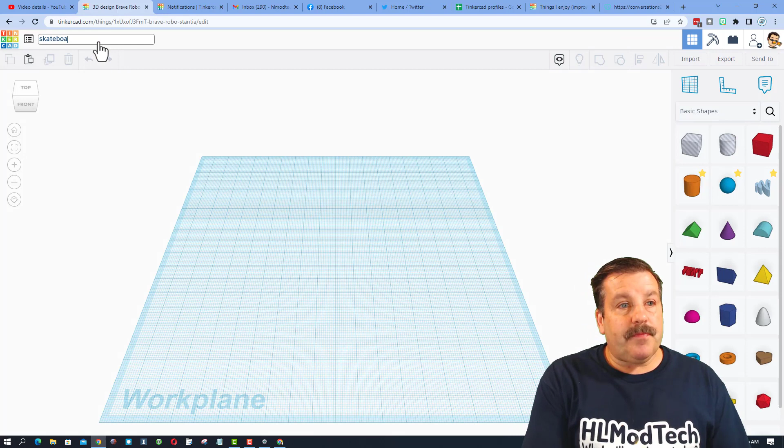So step one, friends, is to get to Tinkercad, hit that plus sign, and we're going to make a brand new 3D design. I'm going to name my design skateboard, and I always put my initials after it as well.

Friends, we are going to try and build reasonably accurate trucks. So what I did was I typed in skateboard trucks diagram. I've got a picture of it. You can see there's a base, there's a part that spins, there's a locking nut. This is the swivel that allows the trucks to work. We need a post and then the place where they screw on, and then we also lock it up top.

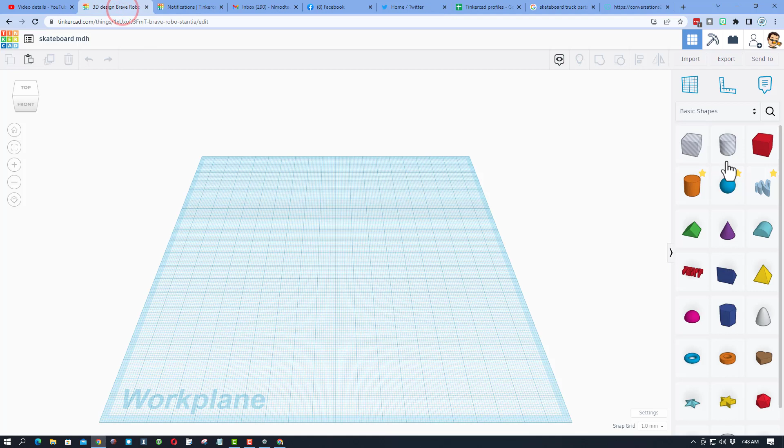Let's take this thought and go back to Tinkercad. The first thing we're going to add is a plate. When you bring this out, friends, I'm going to recommend doing shift stretch. I want to type the number 30 down here so it's 30 in every direction. But then I'm going to tell you that a good size for this is 2.

If we bounce back to our next design, maybe you can spot that this is a trapezoid that's got a chunk cut out of it. So watch this. Back to our project.

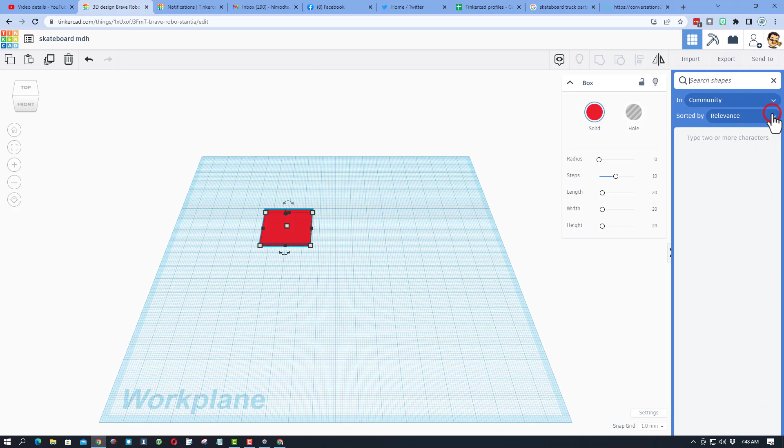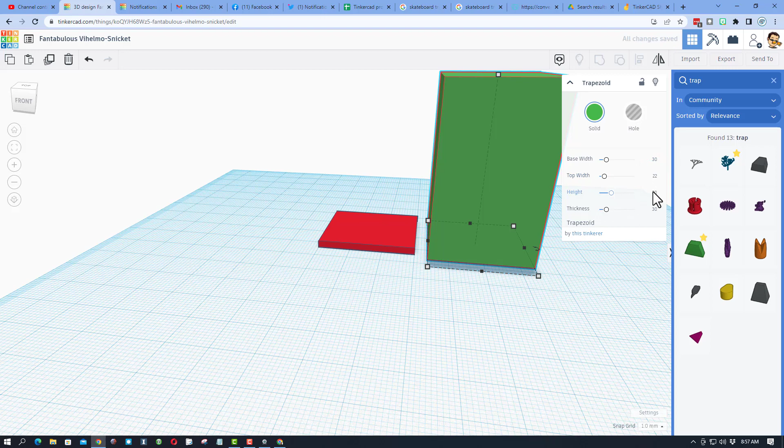Let's search for trapezoid. When you type trap, they will all pop up, and we want this one right here. When you bring it out, we need to rotate it 90 degrees. Notice if you stay inside the circle, it goes to those presets. If you go outside with your mouse, then it goes 1 degree at a time. So we want to snap to negative 90. And real quickly, I need you to type 30, 22, 12, and 10. And then wait for it to render.

And then, of course, select the 2 of them, choose align, make the red one the boss, and do center, center, just like that.

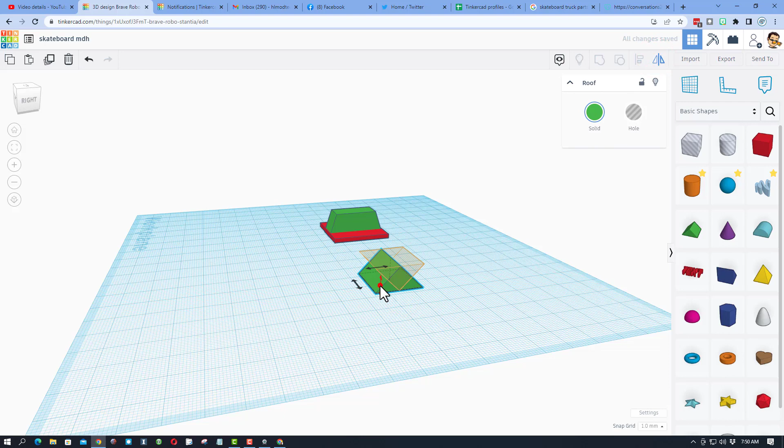Now the next part was to cut a wedge into this. Well, friends, that's super simple. We'll come back out here to the roof, spin it 90 degrees. Notice I'm staying inside the shape, and then let's flip it so it's the other direction. Let's make it a hole, and then pick how you're going to cut. So if I bring this over and I lift it up, remember you can also do control up and down.

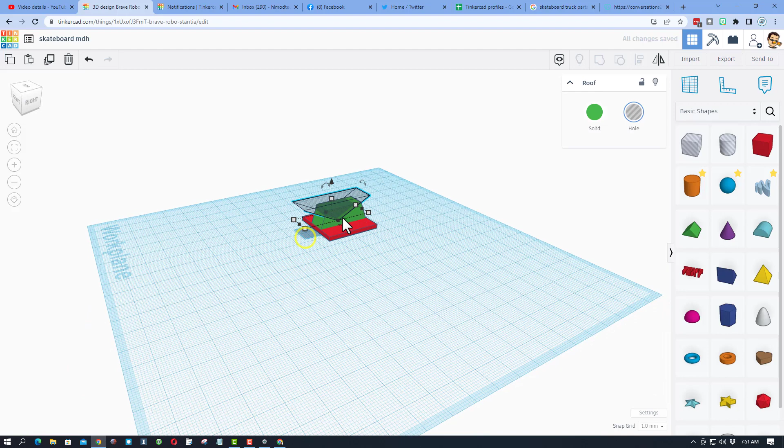I'm going to just custom shrink these till I get the shape I want. So I'm using the black handles as I adjust it, finding a measurement that I think looks pretty cool. Let's go back real quick and look at the real one. Notice it's a little further back than it is forward. So I'm going to do that by just going like this.

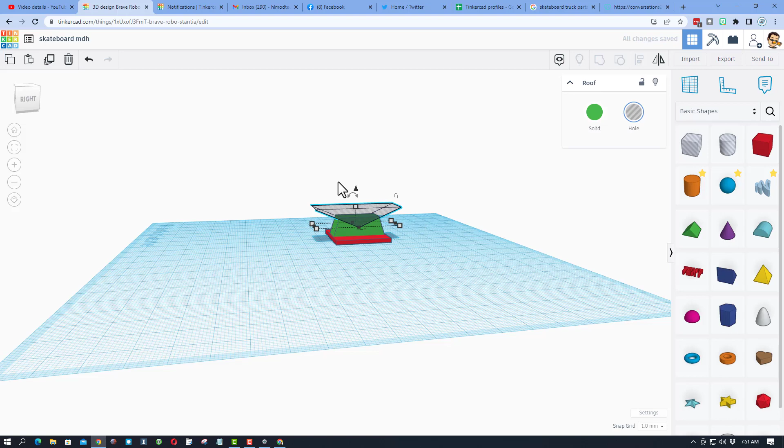If I stretch this back, there it is a little behind 0. You can tell by the gray that it's going to cut out. I'm going to raise it up 1 chunk. And then just because I'm pretty fancy-dancy, I'm going to rotate it a couple degrees too.

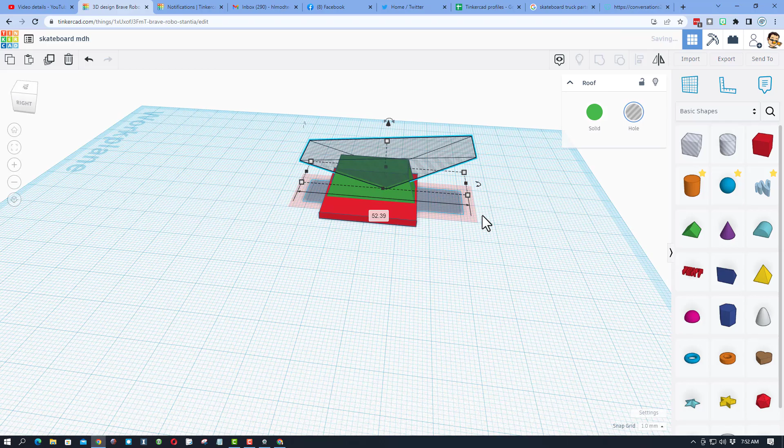And when you've got those exactly the way you want, you can do Shift-Select and Group. After a moment, you can take a look at it and see if you like it. Watch this. If you don't like it, like I think that's too pointy, I can double-click. And if I just stretch this, it makes it completely different. So you can adjust it after you build it until you get the exact shape you want.

How cool is that? Friends, let's bounce back to our image. You can see I opened a second image. On this end, we've got a pivot and then something that comes down into the pivot. And on this end, we're going to have the pin that it goes in. So let's go back. On our design, let's cut out the hole and let's make the pivot.

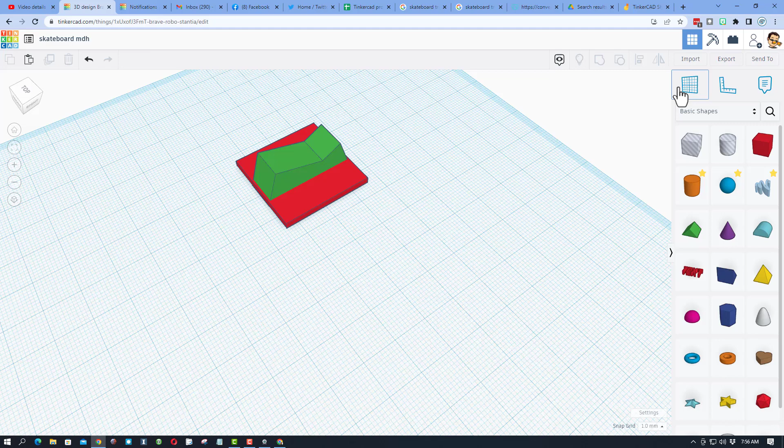First, I'm going to put the work plane on this side. I'm going to bring out the cylinder hole. I'm going to just hold down Shift and shrink it.

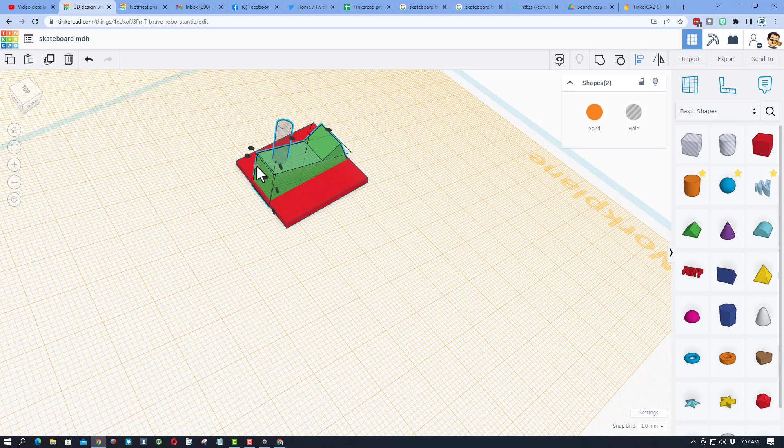And then I want to do one that is size 4. I'm going to make it longer and align it. So let's do Shift Select and choose Align. Now I got lucky and just nailed it, but we want to put it right there and then push it in so we can cut out that hole. I'm going to do Shift Select and Group. And now we've got the place where the bolt will come in.

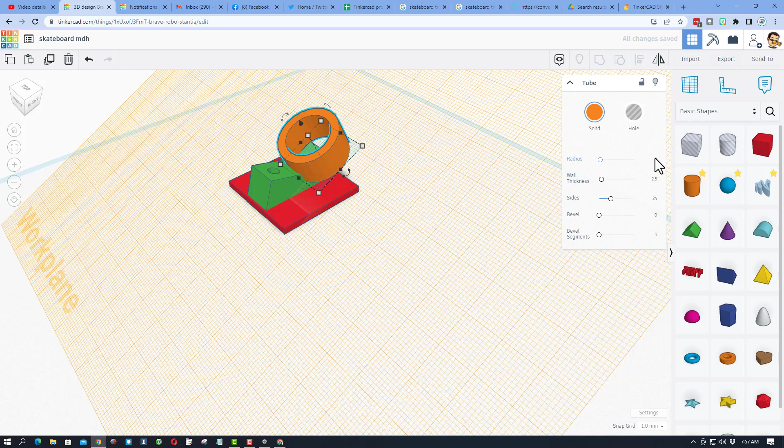Now over here we're going to do work plane, and we're going to make a pivot. I'm going to do this pivot with the tube. When you bring the tube out, I'm going to just type a radius of 3. I'm going to do a wall thickness of 1.7. Let's see how that looks.

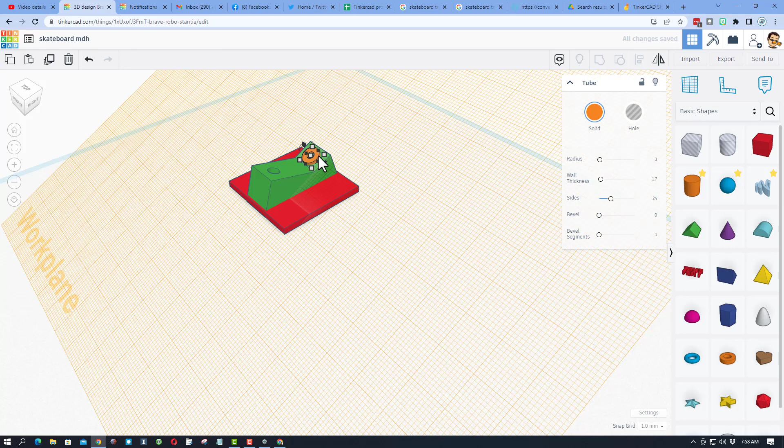See how there's a little dent in the middle? I'm just going to shrink it down to size 1. Let's do Shift Select and Align, and then we want to align it to the middle. And then I'm going to use the arrow keys to move it back to the spot I want. All right, friends, now that we got that pivot, let's see what we put on the pivot.

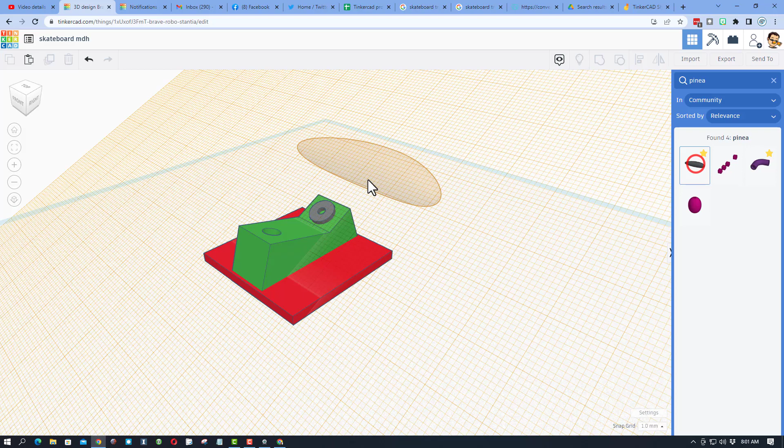See this thing right here that's kind of wide and then gets skinny? I have got a super slick trick for you. Make sure your work plane is on that gray part. Make sure you go to search. And friends, there is something called the pineapple. If you type Pine A, boom, you will get the pineapple. It will land this way.

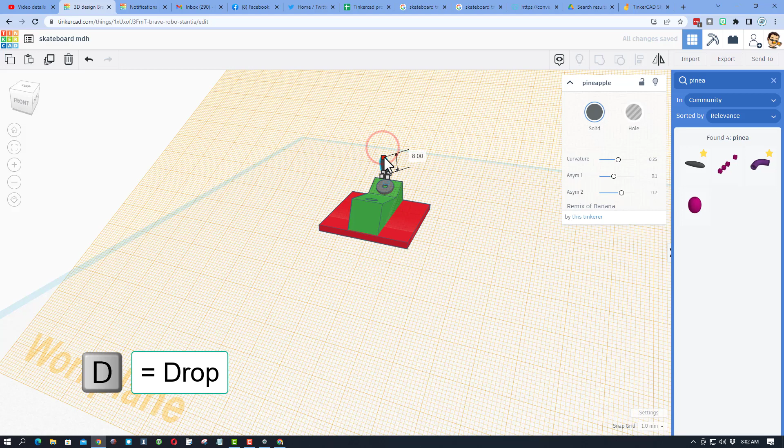We need to rotate it 90 degrees. Once you do that, hit D to drop. And you can see that it arranges pretty slick. You can play with this curvature as much as you want. I am just going to do Alt-Shift, and I'm going to shrink it, do D for drop, and I'm going to do Shift, Alt-Shift a little more, and D to drop so that it's in that place. I'm going to use the arrows,

and then I'm going to call that my pivot. You can shrink it, adjust it. You can play with these to see what they do. It is really easy to make a pretty awesome part that you can then drop in that place.

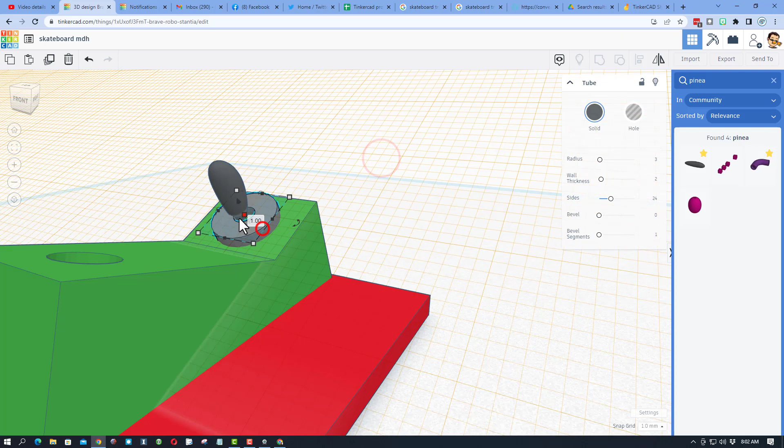And friends, now I'm going to align it by doing Shift, Select, and Align. And if I choose middle and middle, that pivot is now in place. You can have fun adjusting it till you're exactly happy. I'm going to pick a different color just so it stands out. That, my friends, I think is pretty darn slick.

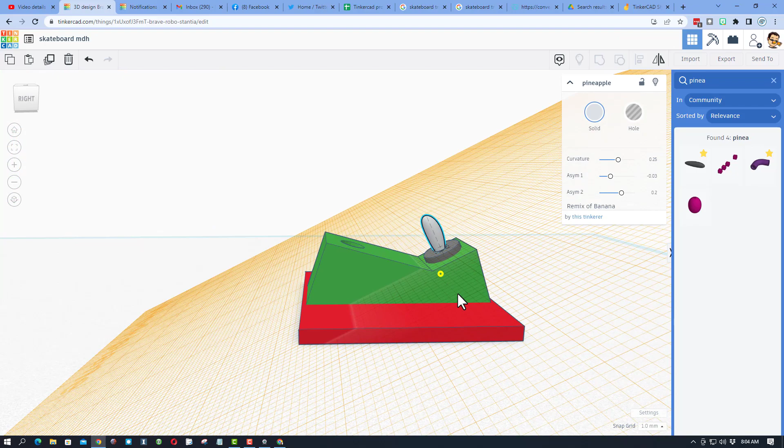Alright friends, let's put the work plane back on the ground. Remember, all you do is hit W for work plane and click out on that edge. Now we may adjust the size of this later, but right now, let's return to our image and let's build the hanger. If you look really quickly, we've got cylinder, cylinder. I'm going to use a round roof. I don't know if I'm going to round this out, but let's do cylinder, cylinder, and round roof real quick.

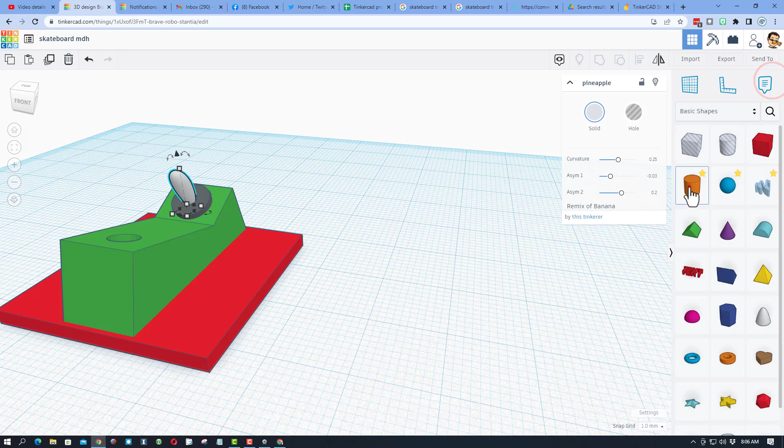Make sure your work plane's flat. Let's close this. Bring out the cylinder. Let's start by making it smooth. Notice if you stay inside the shape, it snaps easy. If you come outside the shape, it's 1 degree at a time. So we want to stay inside the shape.

Then we're going to hold down Shift and squish. And I'm going to tell you a good size for this axle is 3 and press enter. We're going to make it longer than our truck. So I'm going to tell you the good number is 45. I'm going to make it gray just so that makes it look pretty cool.

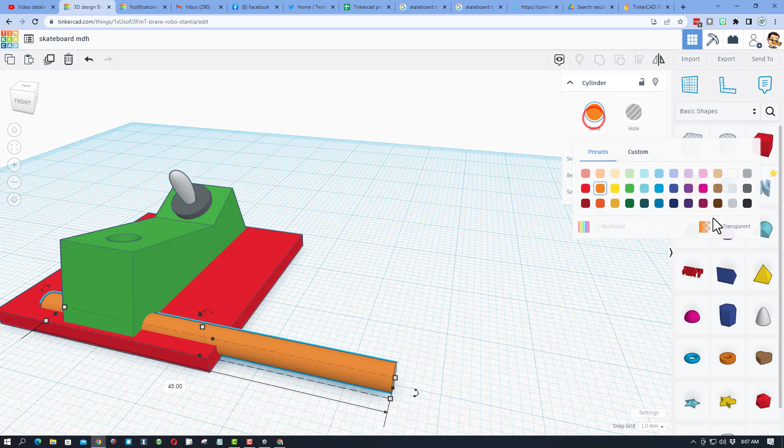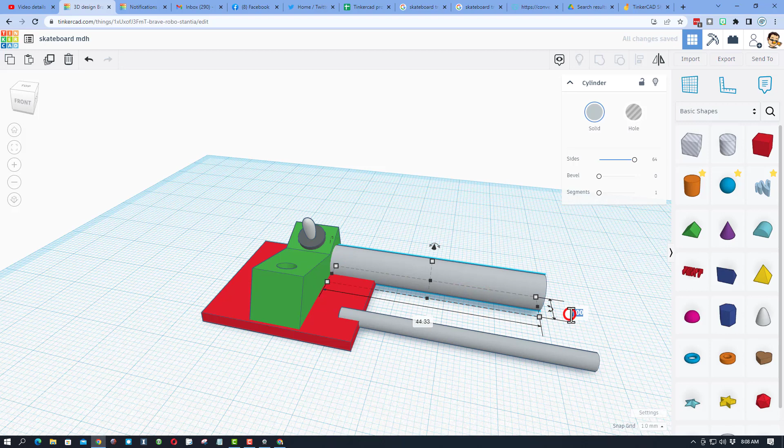And then I'm going to use this as the connector for the wheels. So this is the one that they will screw onto. Are you ready for this, friends? We are just going to do Control D, set it out, make it shorter, because this is going to be the piece in the middle. Now do Alt-Shift, and instead of 3, I want you to type 5, and boom, you've got the 2 main parts of your truck. Do Align, click on it, do Center, and Center. Bam! You have just built those 2 pieces.

Now remember, friends, we're bringing out this round roof. If you bring out the round roof, we do want to stand it up.

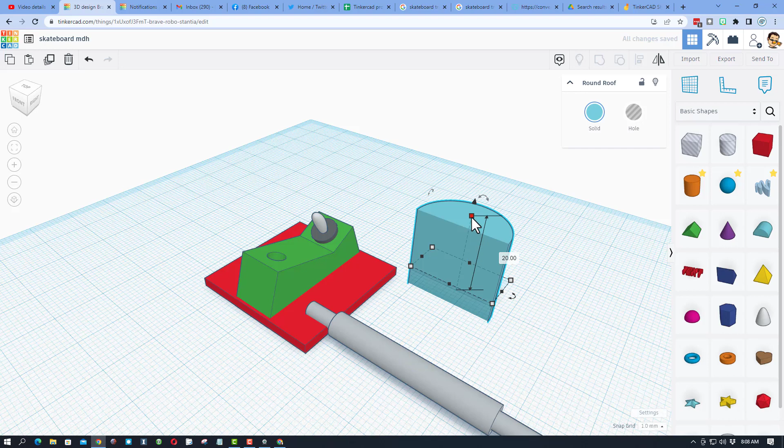We're going to keep its measurements, but we're going to make it 4 thick. D for drop, so it's on top. Bring it into place, and then we are going to pull it out just a little bit more. And we do want to align it, so I'm doing Shift Select, Align. I want it to be aligned vertically, so I'm looking at it from an angle. And bang! With that one being the master, now it's in place.

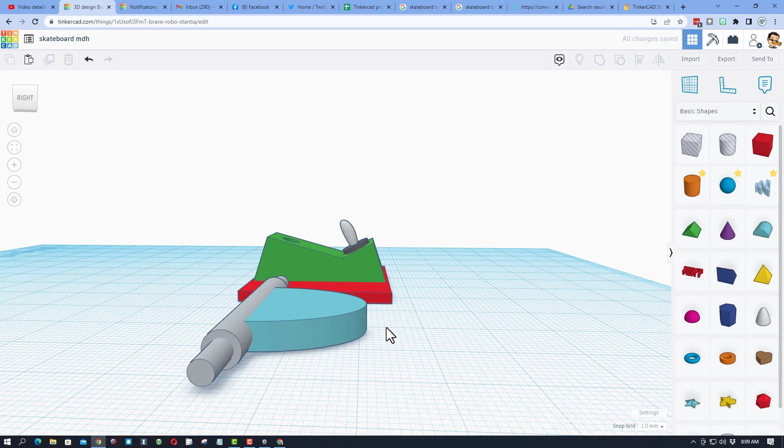Let's make it the gray. You can pick a fancier gray. I'm flexible. It's kind of nice to have them mix and match.

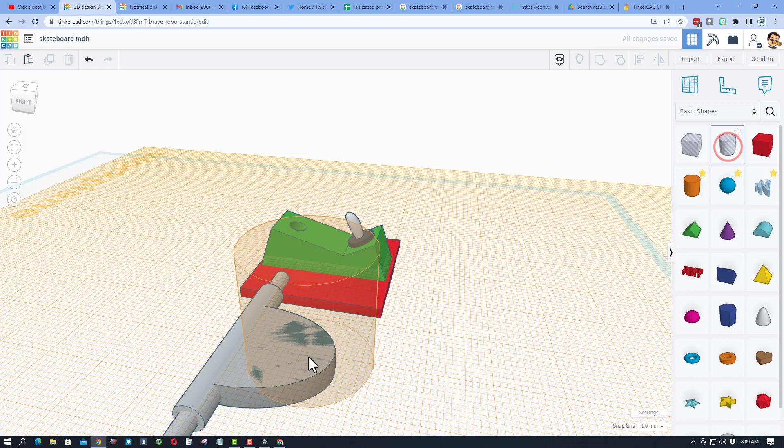Let's return to our images. You can see that we have just built this piece. Now we need to cut out the hole where it goes through. To do that, we're simply going to put the work plane right here. Bring out the hole cylinder. It's too large. Let's start by doing the sides though.

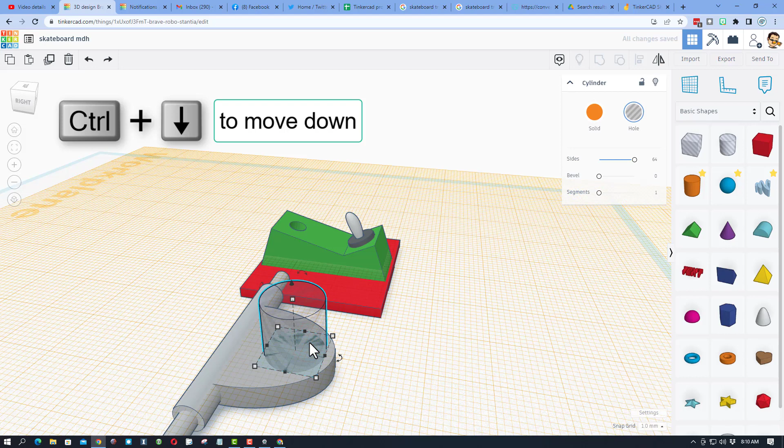Let's do Shift Shrink, and then a good number is 10, press enter. Move that into place. You can align them by doing Shift Select, click on it, and boom, I already had it there. You may have to click that button, of course. And I'm going to do 3 clicks down, so 1, 2, 3. All right, so that one's going to be the first indent, and then we're going to do one more.

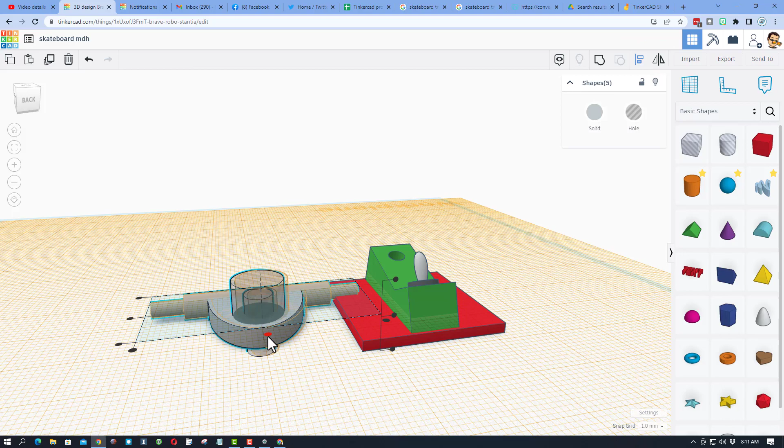So click on that piece and do Control D. Make it a lot taller, but then hold down Alt and Shift and make it skinnier because it's going to be the hole that we push through. Make sure it goes down below. Grab those 3 parts, friends, and make sure they're all aligned. And hit Group. And you have just made your awesome front of your truck.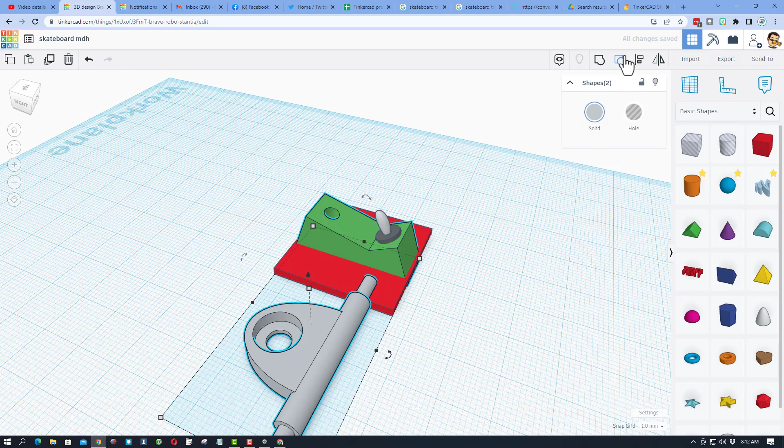Now currently we need to flip this around. So all we're going to do is hit Flip. Boom. And then let's move it into place. I'm going to put the work plane back on the ground, and then I'm going to do Shift Select, so I've got the green one and the gray one. And if we do Align and make the green one the boss, that should line it up pretty sweet. After I get it lined up that way, I'm going to just do Control up to raise it up.

Notice if you ever make a mistake, just use the undo button, which is Control Z. And check it out, friends, that's starting to look pretty sweet.

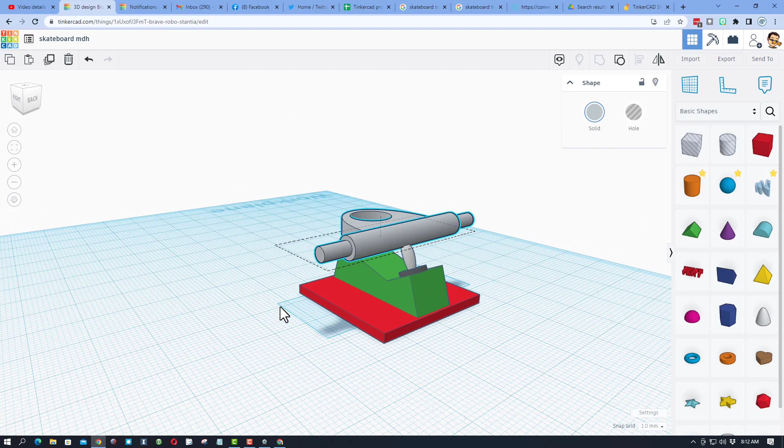Now that you got these two pieces in place, you can click back here and put your work plane on this cylinder, and you can do Alt-Shift to get that the right size for what you just built. And if you need to be more precise, don't forget you can change your nudge to a different number as you tinker and get the exact shape you want for that pivot. I'm going to put it back to 1 millimeter.

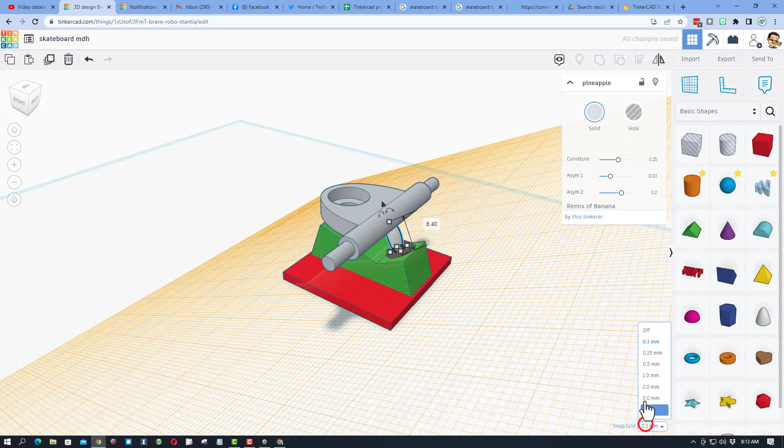I'm going to put the work plane back on the ground, and let's check out the next part of our image. Our next step is to snag some bushings and add a washer.

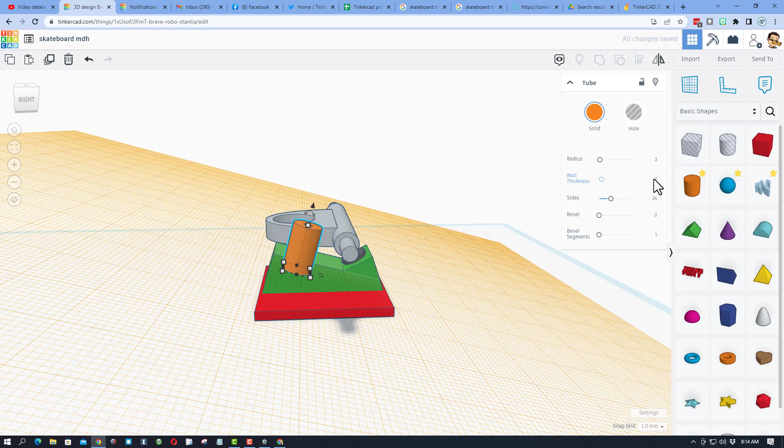To add the washer, we're going to put the work plane right here, bring out a tube. Good numbers are 3 again, and this time we're going to type 2 again, and then if you make it really thin, you can see if you like it. I'm going to type the number 0.2 because I want it to be that skinny. I'm going to hold down Shift and click the green one, choose Align, make the green one the master.

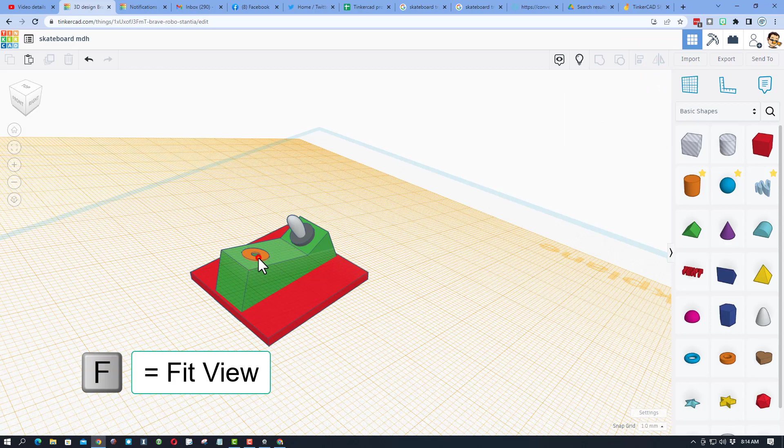Let's look at it from a corner so we can see those dots. That's the one we want. Let's hide this, and I'm going to do F for fit view. When we spin around, we can see how well that lines up. Pretty good, but the hole was not right.

Let's change that wall thickness to 1.5. You can see that's a little better, and now we can see we were missing. If I change my nudge to 0.1, I can nudge that up there so it fits absolutely perfect. Make it a different color. I'm going to go with a black this time.

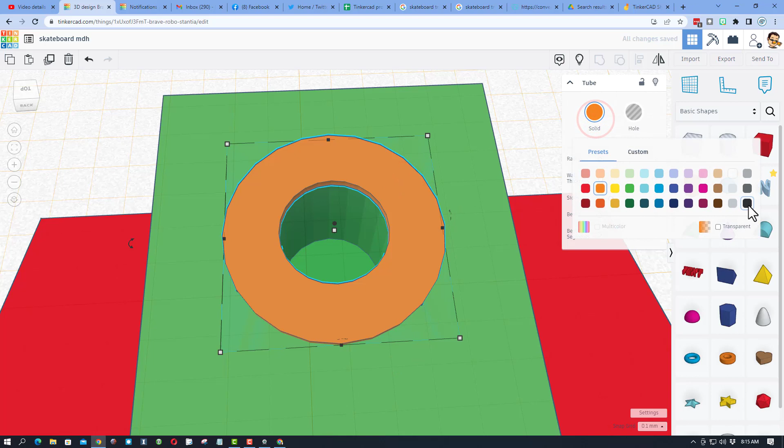And then, friends, with that work plane in the same spot, we're going to make a bushing. Now, I just brought out a cone. If we do fit view, we can see the cone.

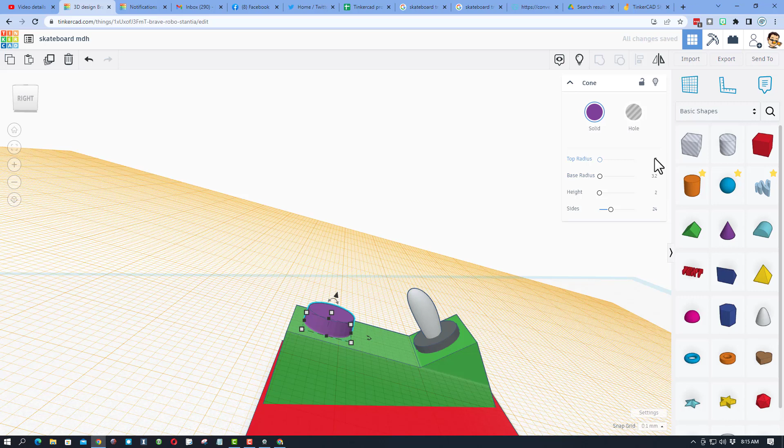Now, our measurements were not perfect. So instead of a base radius of 3, let's try 3.2. Let's try a top radius of 2.5, and let's do a height of 3. I want to let you know that if you ever play with the handles, it breaks these measurements, but I really recommend you just change your numbers right here.

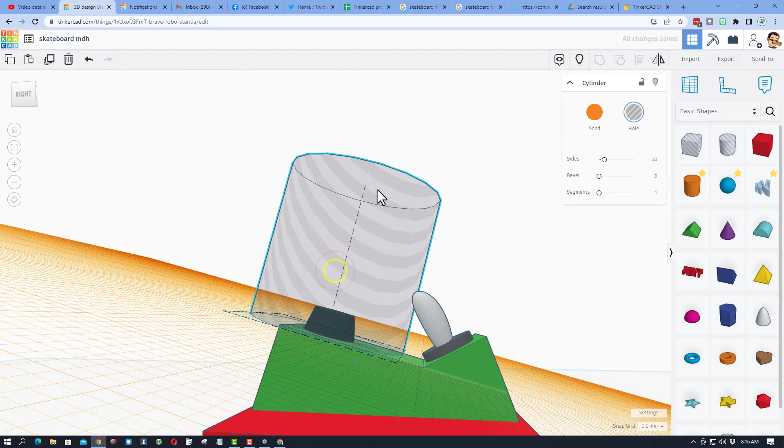I'm going to make that black, and then we need to cut a hole in it. Since we have the work plane here, if we bring out the hole cylinder, it lands in that perfect spot. Let's make the side 64. And then, friends, we want to do Alt-Shift again, and the number you're going to type is 2, and press enter. Stretch it nice and long.

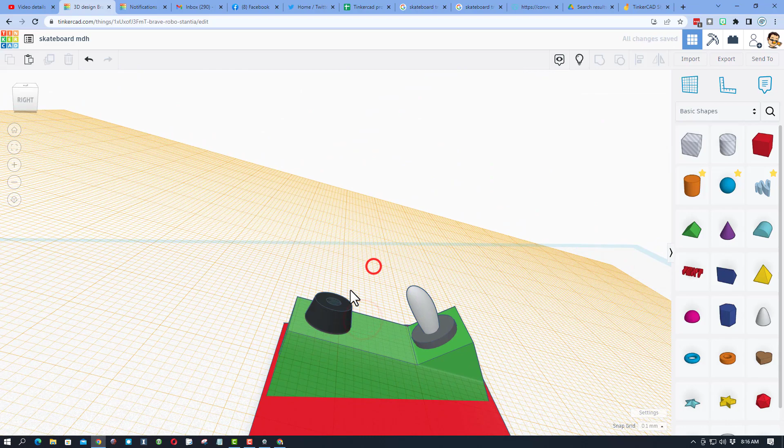Shift, select, and do align. Center, center. And we want to do the top. Now, friends, if we look at that from the side, we can grab those two shapes and group them. How slick is that?

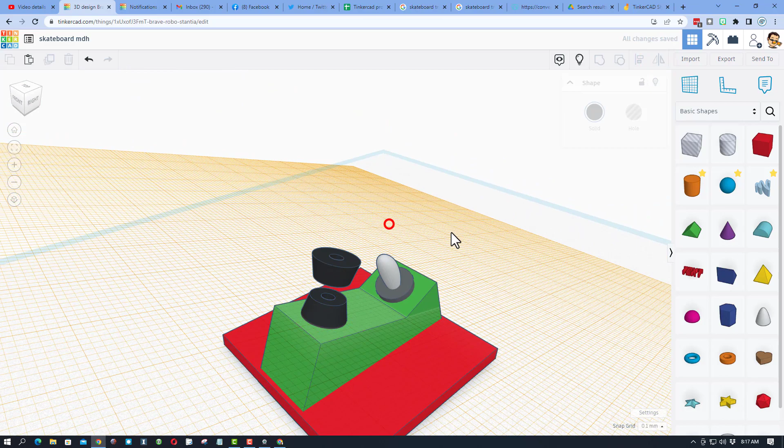Now we need 2 of these, friends, so just do Control D, Control up arrow, so you're raising it up above. And the second one flips that way. How slick is that? Now this one you can adjust if you want to make it look a little different. Just like that. Now that it's finished, it's in place.

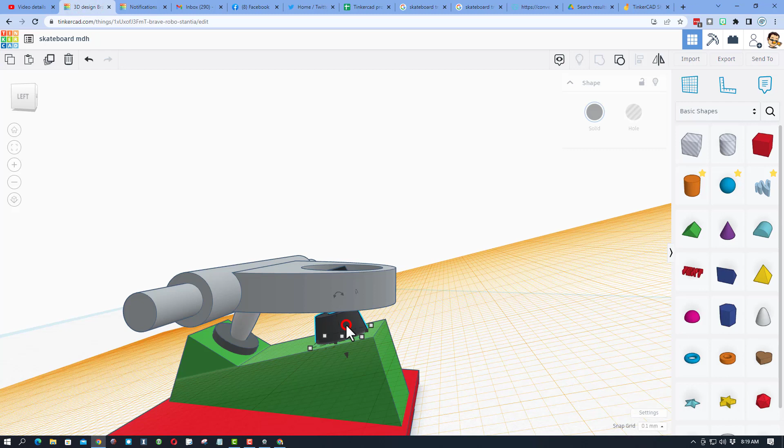If we do show all, you can see all our parts now appear. Friends, real quickly, notice it's small side down, big side up. Big side down, up. So let's go back here and fix these real quick. We need that one so it's small side down. So with the work plane this way, we're just using flip, and bingo.

This one is correct. And now we need to rotate this so that it matches. So if I just do this, you can see that I can solve it pretty darn quick, 1 degree at a time. That's pretty sharp.

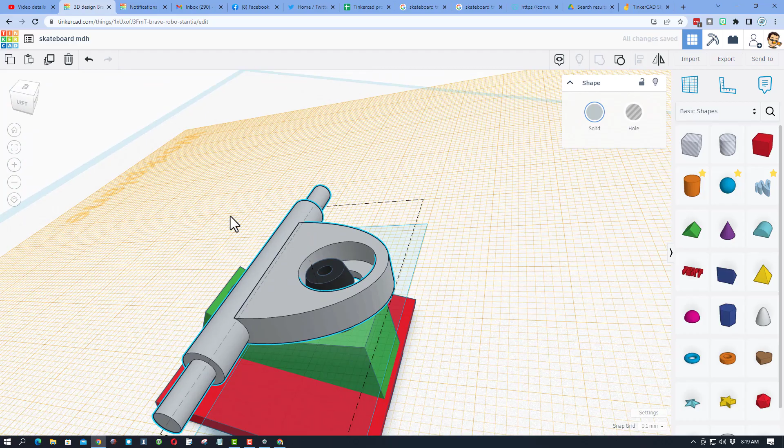Now let's line up the holes. I'm just going to nudge this forward till that fits pretty good. I'm going to hit work plane on this little spot right here, and if I do D to drop, that'll now be at the correct height.

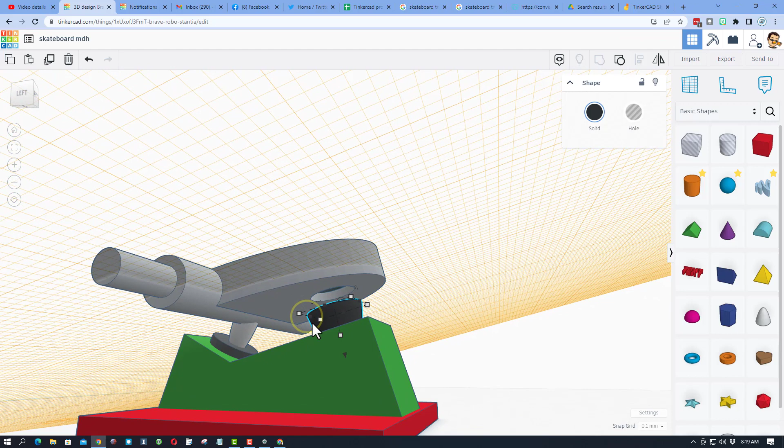I can take this and stretch it to the correct height. Another cool trick is if I do W, I can drop it to right there. D to drop, and now I can just stretch this so it fits where I want as well. The holes are lined up.

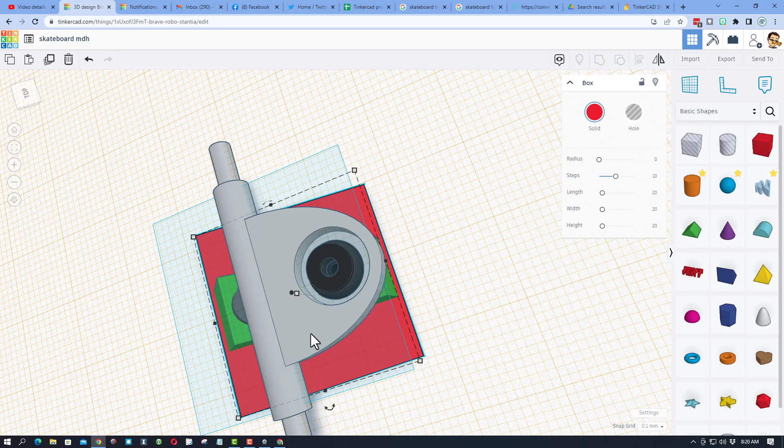If you want to make these a little larger, make sure the work plane is on the correct side, and now you can do shift stretch to get them to the exact size you want. Notice if I put the work plane inside there, you can make sure you drop it to the exact piece too. Friends, I'm going to put the work plane down on the ground.

That's pretty darn awesome. Friends, if we check back at our design, notice this kingpin comes in from underneath, and we need to add these holes. We need to fix that underneath part. Let me show you how easy we can do this.

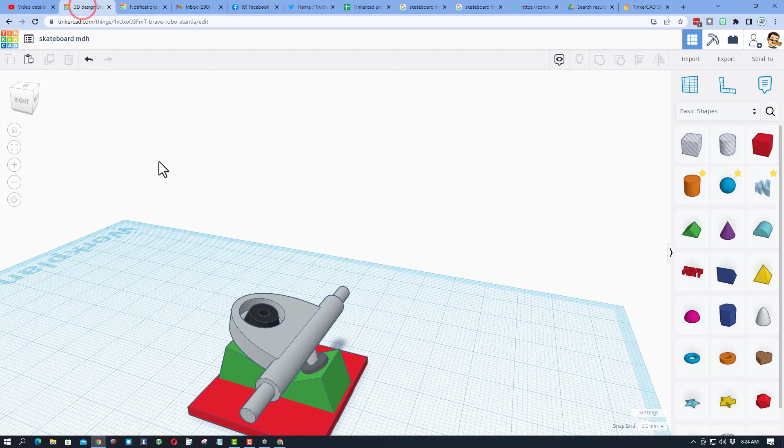If we go back to our shape, let's hide these top pieces so they're not in the way. You could also do Control H. And let's hide the bottom piece. And let's just do ungroup.

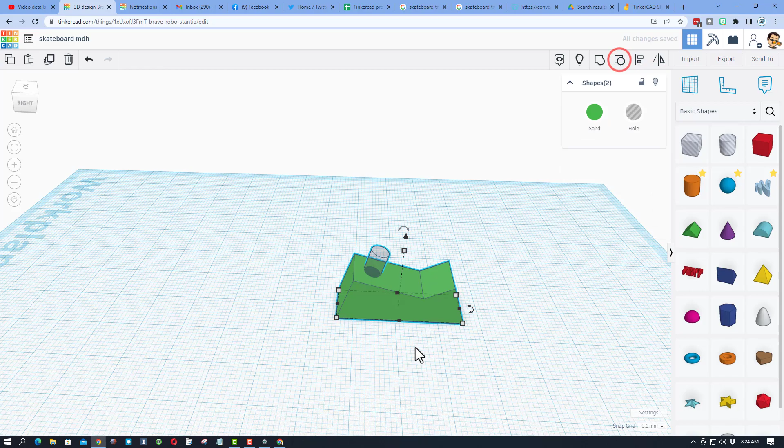And we need 2 of these to cut out. First, put your work plane on top. Then do Control D, and push the second one down below. If we look underneath, you can see it poking out.

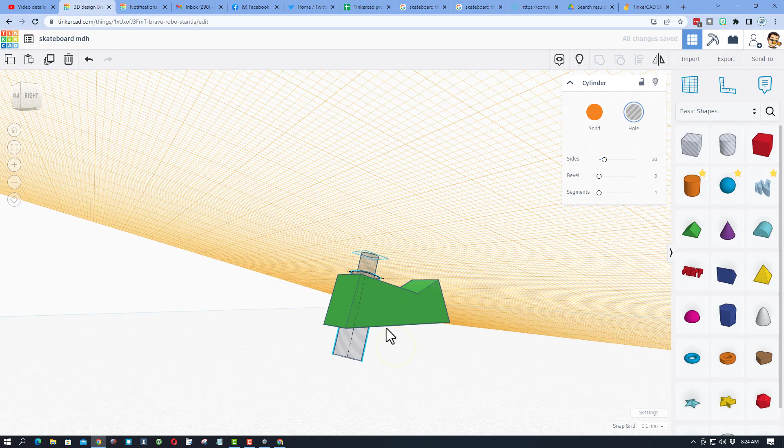Now we're going to take and stretch it. So all we're doing is Alt-Shift so it goes around the middle, and make it some size that is bigger. Notice it popped out. We're going to push it way down. If we hit T for transparent, let's make sure that's connecting. So notice I got to push it up just a little.

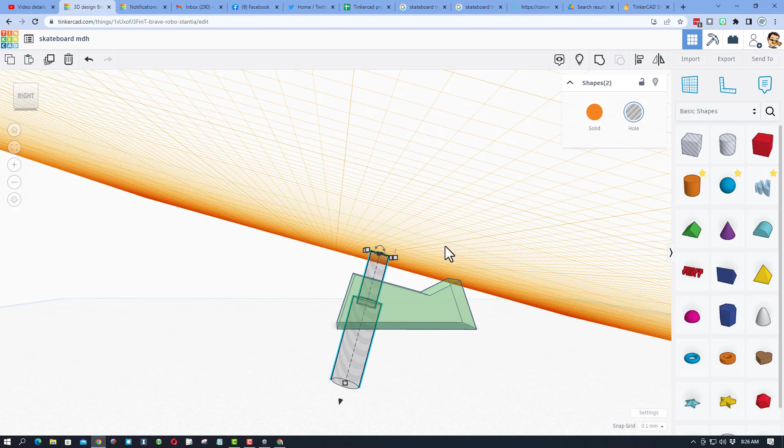So now, friends, we've got the holes for our kingpin. Watch this. Click on the first one, hold Shift, click on the second one. Do Control D, and let's do Shift Nudge to move that one out, and make it a solid. Now let's come back to the holes and group them.

Let's do T to make that back a solid. Notice how slick it looks. And then, friends, this is one of my favorite parts.

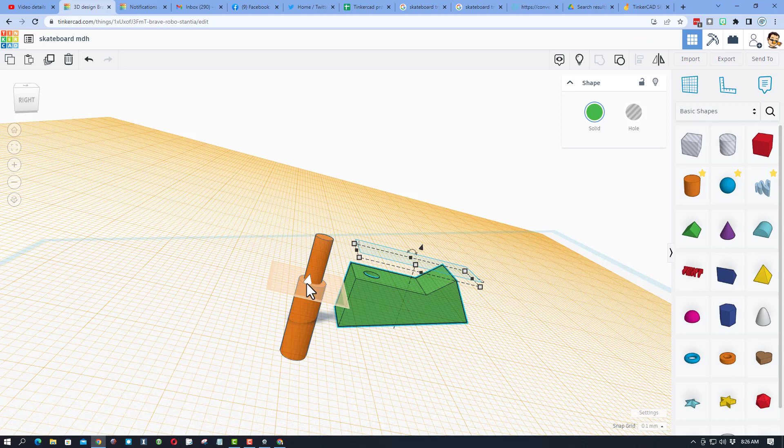Let's put the work plane up here and let's turn this into the kingpin. So I'm going to stretch it way up and shrink it way down, then stretch it way up again, and I want this to be a tiny bit smaller. Make sure your nudge is 0.1.

Do your Alt-Shift, and let's check. Right now it's at 4, so I'm going to click and make it 3.2.

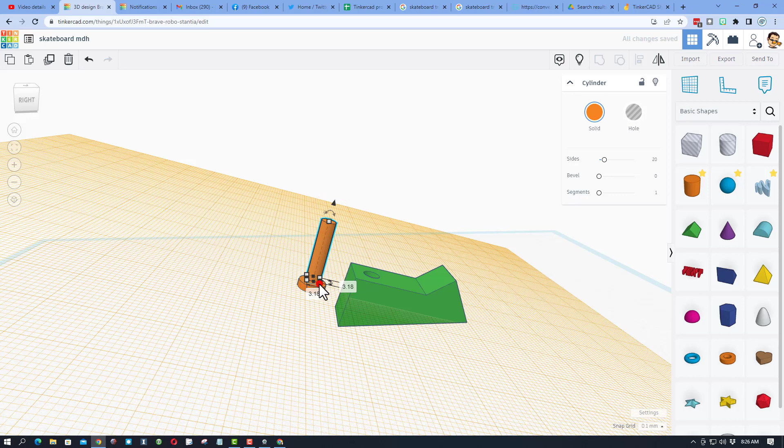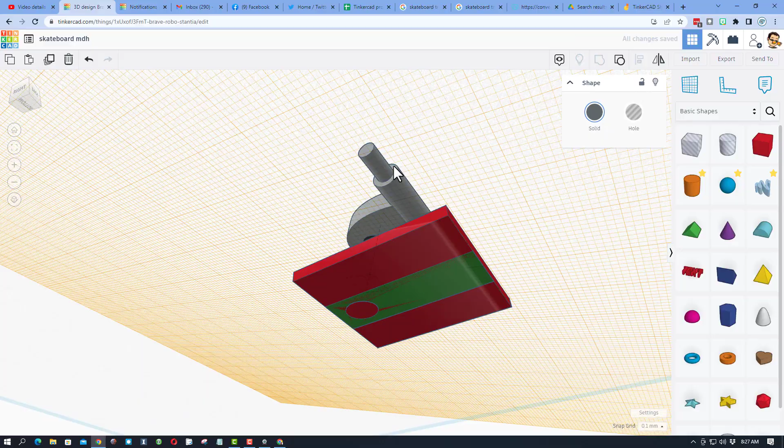I'm going to take those 2 pieces and group them, and make them a darker gray. Remember those shift nudges? I'm just going to do shift nudge back until it's in place. When we do show all, you've now got your kingpin in place. And that, my friends, is pretty darn slick.

Friends, let's take one last peek back here. We need to make these nuts. Notice they are hexagons. Watch how slick this is. So, friends, bring out that polygon.

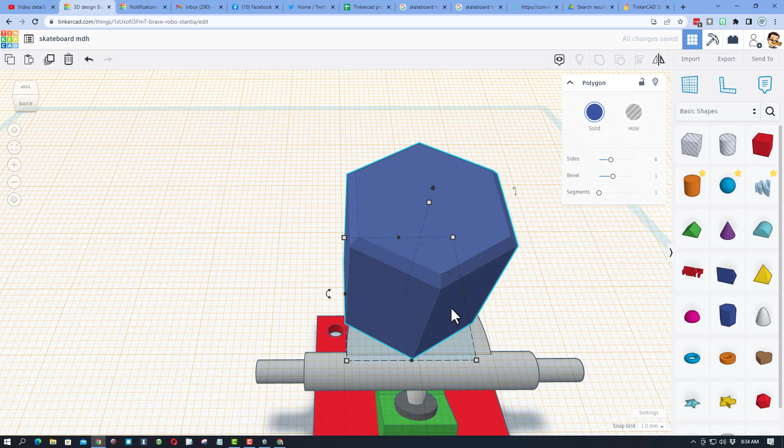I'm going to tell you a bevel of 1 is pretty darn sweet. Do Alt-Shift, and see how it says 17? We're going to take it down to 6.

Squish it so it's the thickness you want, get it so it's centered, and let's pick a color that's pretty darn cool.

And then we need to cut the hole in it. So I'm going to move this out so it's aligned. We can do Shift Select to make sure it's aligned.

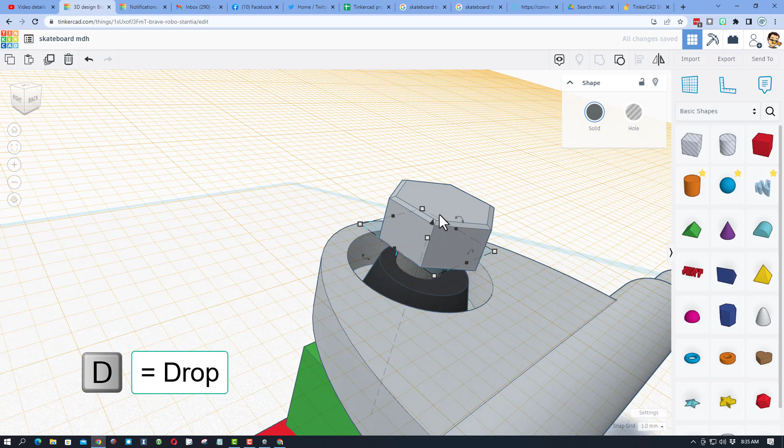And we want middle and middle. Now to cut the hole, we're going to do the work plane in that same spot. We're just going to bring out the whole peg. If we do Shift Squish on this, I think the number we want is 3.

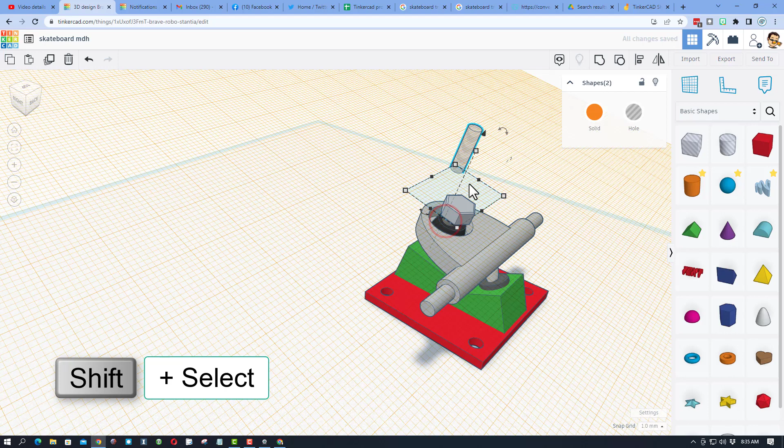We'll make it longer. I'm going to do Shift Select on that pin underneath and do align. Make the pin underneath the boss and choose middle. Let's zoom in so we can find that other hole. And middle.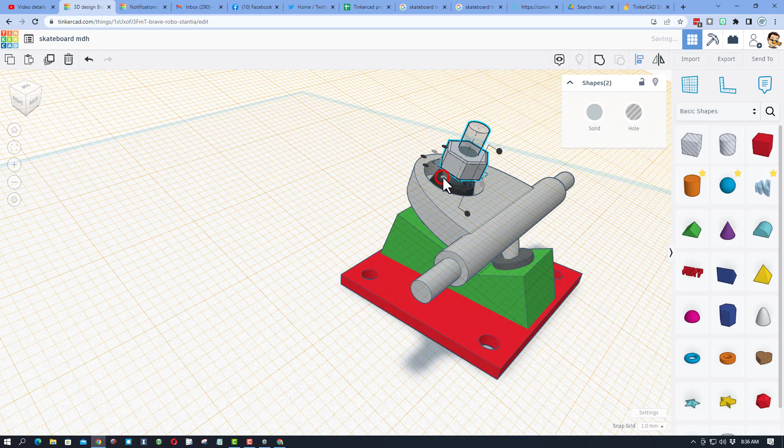Now we can click on the pin and push it through. Make sure that these are both aligned, so I'm doing Shift Align again. We got this one, we want that one, and when we hit group, we will have cut out our nut.

And we can push it into place, and do one more line.

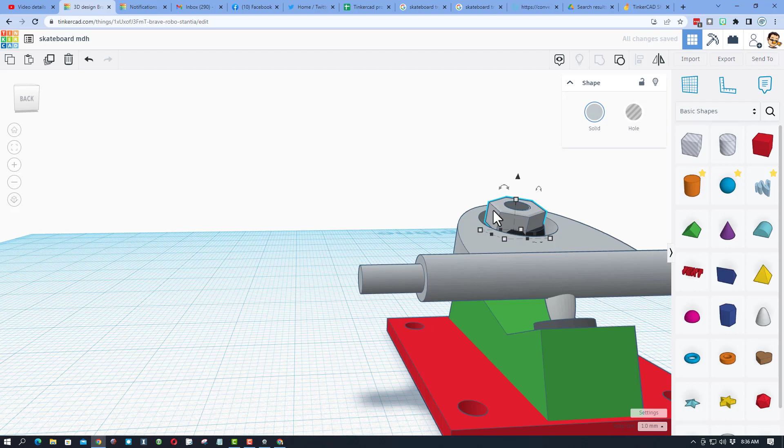Bingo. Let's put the work plane back on the ground and let me show you how to reuse this. If we do Control D, we can move it over to the spot we want, and 90 degrees is the exact right number that way.

But then you need to bring it over to your shape and manually find the number of degrees to rotate. Ours will probably be different, but you can see that 12 was pretty slick for mine.

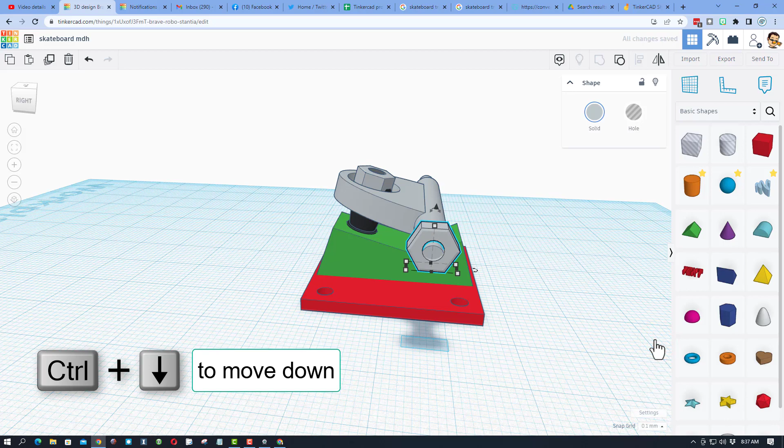I'm going to do Control down and move it into place. You can see that with just a little bit of nudging, I can get it where it needs to be. I'm going to do Control down with that, and that's pretty sweet.

This also is a good way to double check and see if you've got it really aligned, and you can do those 1 degree nudges until you're exactly happy.

We do want one on both sides, so do Control D, and then I'm going to do Shift Select, and I want to move it all the way to this edge right here.

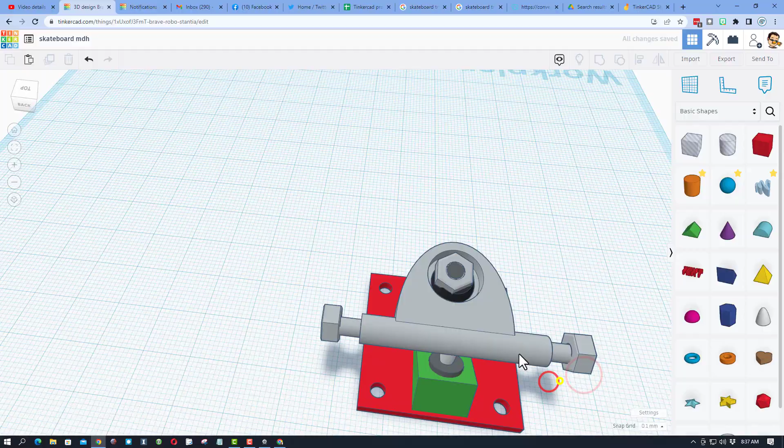Holy moly, friends, not exactly my fastest tutorial, but oh my gosh, we have just built pretty darn accurate skateboard trucks. How cool is that?

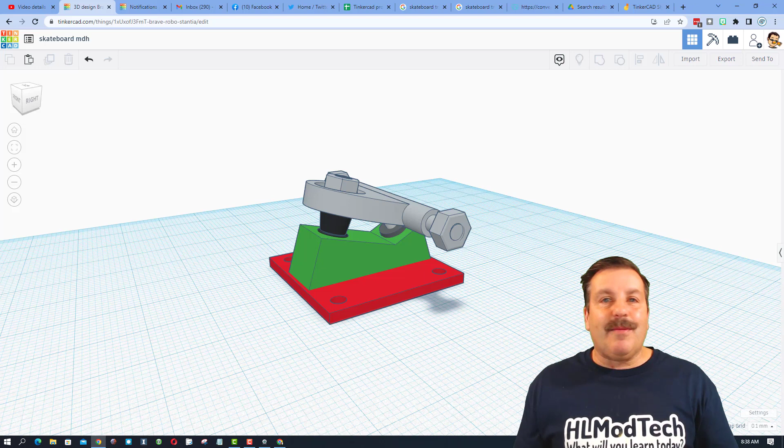Friends, I want to send a shout out to Kylie for asking for it. Oh my gosh, what a fun project, and just once again proving how much you can do by looking at an image and just building things piece by piece.